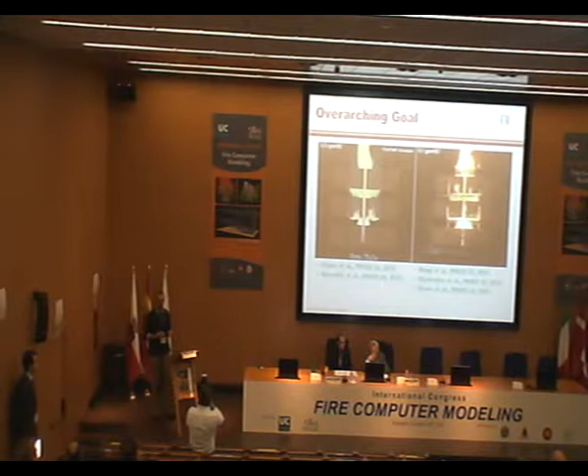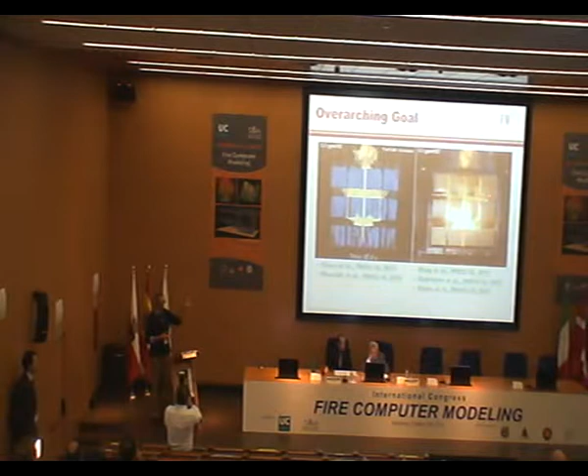And this is where we're at right now, where we've coupled fluid dynamics combustion with water suppression. This is somewhat qualitative, but it kind of gives you the state at which we're in right now in terms of prediction of fire dynamics. This is basically a simulation of a reduced array. It's 4x2x3 boxes that are about 1 meter cube.

And we're putting on a uniform flux of 0.3 gallons per minute per foot square. It's about 12 liters per minute per meter square. And as you can see, qualitatively, we're able to predict the reduction in fires as we start applying water. Granted, this is a pretty large flow rate. And down on the bottom, you have a number of publications in the last 2 years that lead up to this work.

So we have, as I said, interest in modeling fire growth and having a tool that can be applied to large-scale modeling. Because as of now, all our fire protection requirements and standards are developed through experimentation with large-scale testing. And as you can imagine, that large-scale testing comes with a large cost.

So having a modeling tool that has predictive capabilities can allow us to cut down on the amount of large-scale testing that is needed, thus reducing costs, and also allow us to have a tool where we can interpret experimental results better, we can extrapolate, we can interpolate, and so on. So it gives us much more flexibility.

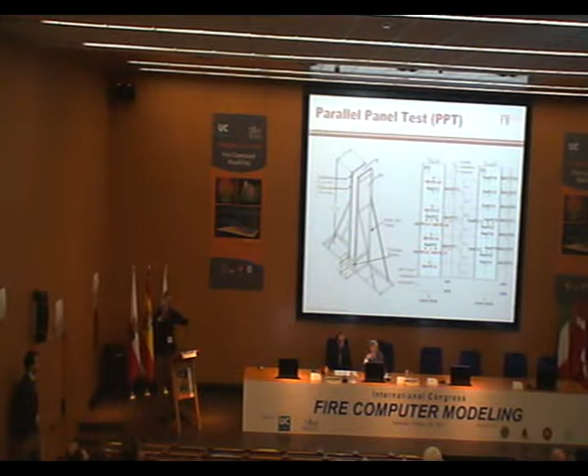And this is the actual point data that we'll use as partial validation of the model results. In addition to this, we also measure heat release rate as the fire propagates over the material. All right, this is a picture of the parallel panel apparatus.

So for the numerical modeling, we use an open source tool that we developed in-house. You can find the model itself at this address. It's a large eddy simulation solver based on the CFD toolbox offered by OpenFOAM. And we have added several subgrid scale models. The subgrid scale turbulence is treated via eddy viscosity in a gradient diffusion model. Soot formation, oxidation, radiation, it's treated with the laminar smoke point based model, which Professor Delichatsios alluded to earlier.

And then as far as the solid phase pyrolysis, we're using a simplified one-dimensional model with one-step reaction that turns the virgin material to gas and char, and it's a finite rate, an Arrhenius type rate. And for this type of model, since it is not a detailed, comprehensive model, we have an approach to actually determine the material properties that go into the model. We call it model effective or model specific material properties.

Okay, as far as the extensions, we have 4 listed here. What I'm calling WALE is a wall adapting local eddy viscosity model. As you can imagine, for large scale models, we lose a lot of resolution if we want to treat a large domain. So near the wall, we lose a lot of information, especially transition to turbulence, boundary layer, and so on. That cannot be treated with the resolution that we have right now.

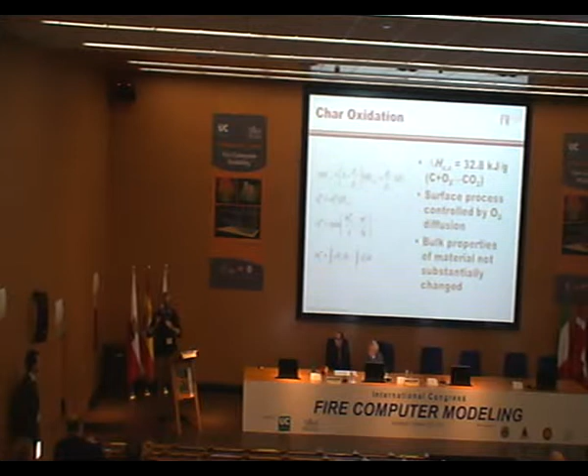This assumption, actually, we've confirmed by doing oxidative pyrolysis experiments, and that has been published in the combustion symposium earlier this year. And another assumption is that the bulk properties of the material do not substantially change once you have the char oxidation reaction. This is just to simplify implementation in the model. Again, relatively crude, but our intention is just to see what is the difference in the actual large-scale simulation when we have this versus when we don't.

All right, for the material properties, this is basically it in a nutshell. We have a bench scale experiment from which we're measuring some observables. We have an input to it and then a response. I'm differentiating here between true input and true response versus what we observe, to represent that all these measurements have some inherent uncertainty. Then we use a model, subject to some input parameters, to represent what is observed, and we adjust these parameters through optimization so that the model response matches the experimental observation. So that's basically the optimization approach.

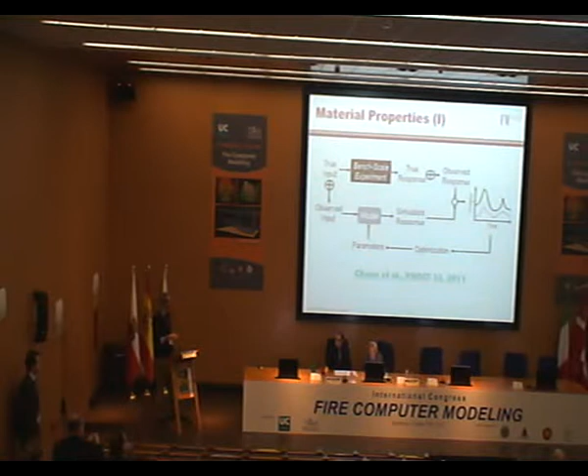In the context of the present application, we are interested in getting material properties for the pyrolysis model, and these parameters are the so-called material properties. This was published a couple of years ago, again, in the combustion symposium. The bench scale experiment here is the results obtained in a fire propagation apparatus, shown schematically here. We have a sample sitting on a load cell, being weighed as it receives external heat flux at various levels. The two observables we're interested in are the mass loss rate and the surface temperature, measured with an infrared pyrometer.

Again, the material we're interested in is corrugated cardboard. It is a hygroscopic material, so we need to control the relative humidity, which we're able to do in our system for the environment this material sits in. For all these tests, we use 100% nitrogen as the environment, so they were all strictly pyrolysis, no oxidation. And we're using an insulated sample holder that gives us a well-defined boundary condition on the back of the sample.

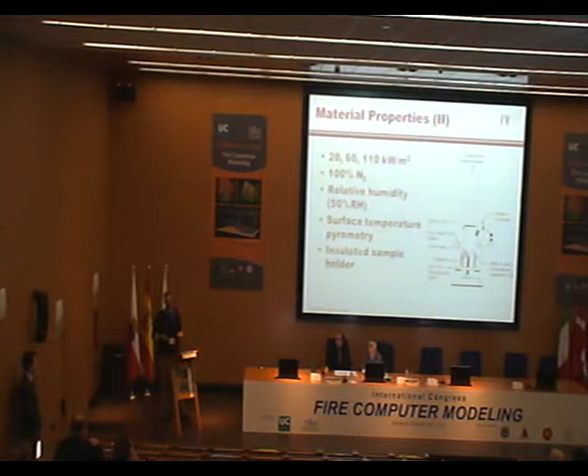But the pyrolysis model is very sensitive to the boundary conditions that you employ, right? The insulation on the back gives you a well-defined back boundary, but what happens at the front also needs to be determined, because between a fire scenario and the FPA scenario we have a very different spectral environment. The FPA heaters operate at a relatively high temperature, much higher than what you would encounter in an actual fire. So we need to characterize the heaters and how that radiation interacts with the surface of the material.

So there are two experiments here. One is to get the spectrum of radiation from the heaters as a function of heat flux, measured with a dispersive line-of-sight spectrometer. It breaks up the incoming radiation with a couple of prisms and directs it into a lead selenide detector that operates between 1 and 4.5, 5 microns. And then we're also measuring surface emissivity of the material using two instruments.

One is ultraviolet, visible and near infrared, basically from about 250 nanometers to about 2.5 microns wavelength. And then also an FTIR that works from about 2 microns to about 20 microns. And we use an integrating sphere to do this. So basically, we measure the reflectivity of the sample versus a calibrated reference and employ Kirchhoff's law by assuming the material is completely opaque. So 1 minus the reflectivity is the emissivity. And we do this as a function of wavelength.

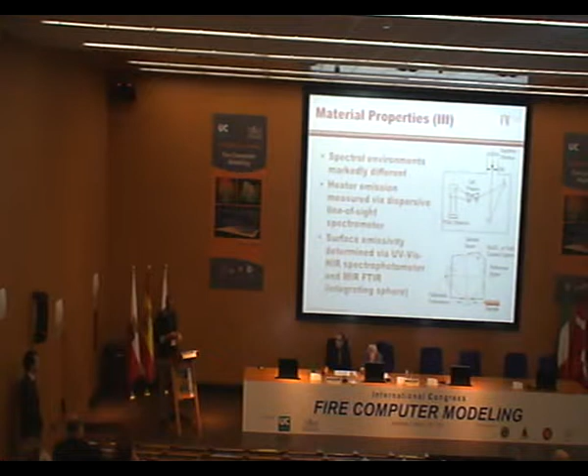All right, so let's go on to some results. This is the heater output, and these are some curves versus applied heat flux. As you can see, I'm putting here the data and the lines. I don't know if you can see the color, it's not that good, but take my word for it, the lines are pretty good. Basically, this is just a Planck's radiation distribution with an assumed or fitted emissivity. The emissivity comes out to be relatively low, 0.1.

Let's keep in mind that these radiant heaters are tungsten halogen. For tungsten, the emissivity is actually pretty low, and they actually record emissivity values for tungsten that are consistent with this value up here. But what I want to show here is that the radiation is gray body like. If you take these intensities and divide them by T to the fifth, if this is a gray body, all those curves will collapse into one curve. This is what I'm doing here.

And this is a relatively good collapse, not so much along the wavelength, and this is because of emissivity changes as a function of wavelength for tungsten, as well as interaction with quartz. These heaters have a quartz window, and you see some of that effect along the wavelength. But for the most part, they're relatively well represented by a gray body distribution. And lastly, we have here the temperature as a function of heat flux as a power curve, and this is consistent with what the manufacturer of the lamps gave us, so it's a good double check.

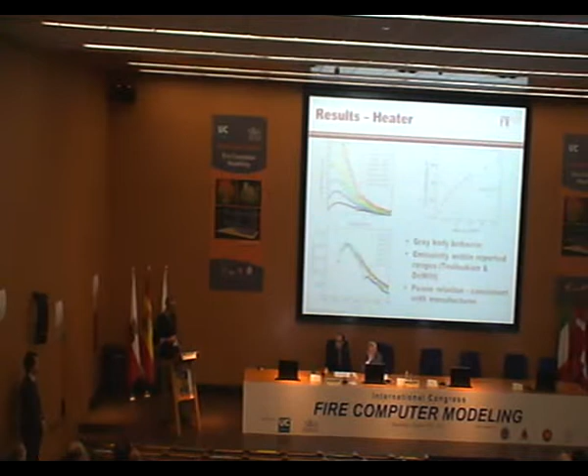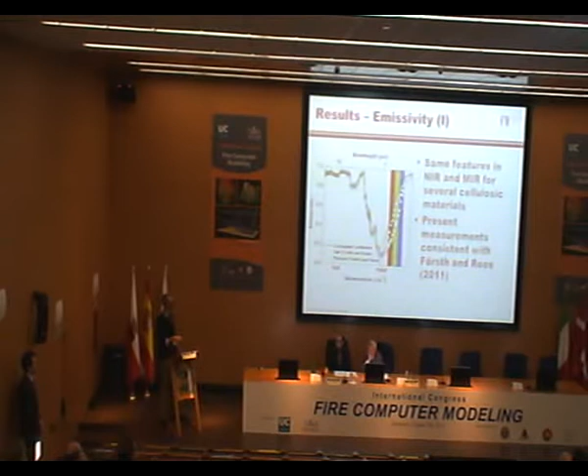As far as the emissivity, this is shown a little bit differently. I'm plotting here versus wave number so that the near infrared and the visible can be expanded. The line is what we measure for corrugated cardboard. And what I'm showing here, which is pretty interesting and we're still looking at this, is that if you look at similar cellulosic materials, there was some data at SP in Sweden, they measured plywood, oak, and some other woods. They're nearly identical to cardboard beyond 1.5 microns. I'm guessing this is due to the nature of the materials themselves. They're all cellulosic materials, so this is to be expected.

They're essentially the same at long wavelengths, and the near infrared and visible wavelengths are different, and this is just due to a difference in color. But we're going to use this curve for the emissivity, and the curves for the emission, and use this equation to get the effective emissivity of the sample, and then for the fire case, we're going to assume that the flame temperature is around 1400 K, and do the same here.

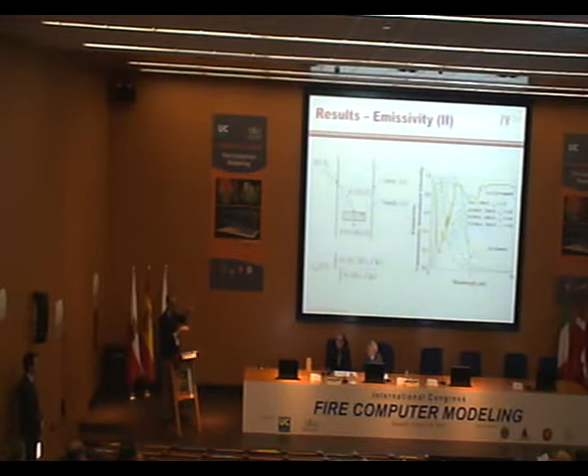So basically, our intensity goes through a quartz glass, so there's a transmissivity times intensity, and it falls on the surface, and whatever is absorbed is the emissivity times the transmissivity times the intensity. So when we do this integral, that gives us the effective emissivity. We applied this to all the heat flux levels that we used in the experiment, and also for the fire case. And as you can see, there's quite a bit of difference in the calculated emissivities versus the fire case. So this is what we will use in the full-scale model, and this is what we use in the pyrolysis model, in the optimization code, to get our properties.

Okay, so this is what it looks like. I'm just showing one case for 60 kilowatts per meter squared. The other cases are equally as good in terms of the agreement. This is what we had before when we first did this, where we left the emissivity as a variable parameter, and this is what we're getting now. They are different, but we're getting similar agreement with the experiment.

Basically, these three parameters and the emissivity are coupled through an effective thermal inertia. So when you fix this, all the other parameters are going to vary. Okay, let me just move on. I'll spend too much here.

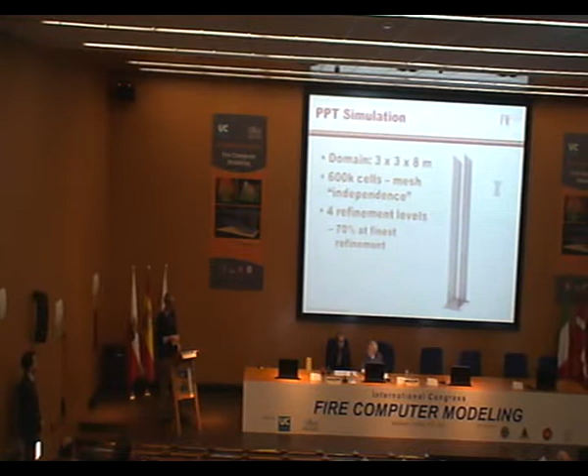So the full simulation for the parallel panels, this is the domain. We're going to simulate a 3x3 by 8 meter domain. We've used an adaptive grid and have most of the refinement between the panels and along the burner. So about 70% of the cells are concentrated in this region. And this is how it looks.

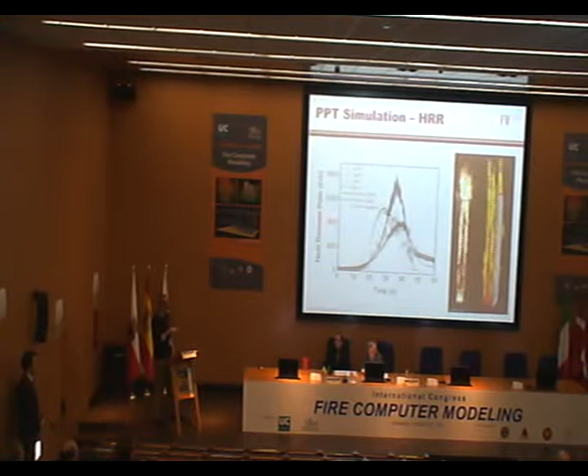So once we integrate all the modifications that I explained earlier, this is the curve that we get. And of course now we're over-predicting the peak quite a bit. But once we start using the char oxidation approach that I showed you, we're reducing the peak, then we're widening the curve, which is what we expect, and the fire growth is actually captured pretty well. This simulation is actually the simulation for this curve. So you can see that it dies down quite rapidly.

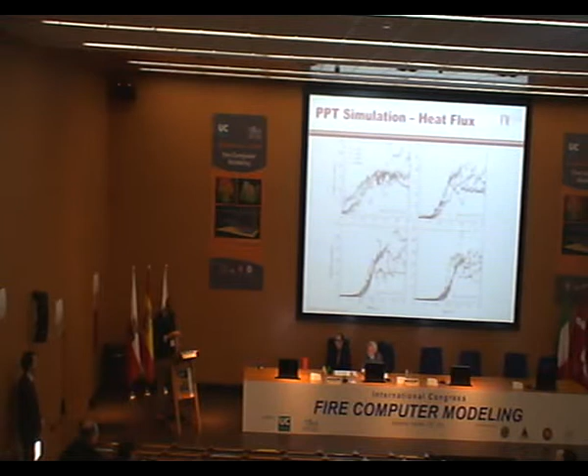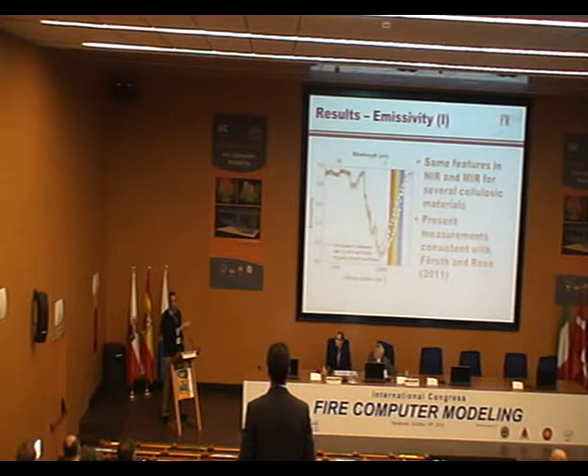Okay. So once you start charring, this line starts going up, and this portion of the line actually goes down a little bit. So on an integrated basis, if you just consider this region, the char emissivity will be lower, yes. But for our purposes, the radiation is concentrated here. So this is not going to have a huge effect on the actual results. Yeah, the char emissivity does go down, but it's only in this region. But still, I think it goes to 0.85 or something like that.